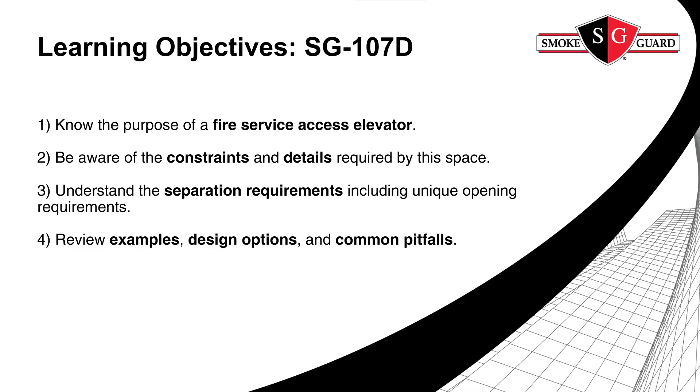In this section, we'll look at the key considerations for fire service access elevators. You'll learn their primary purpose in aiding firefighter operations, the specific design constraints and details that must be met, and the required separations and unique opening conditions that keep these spaces protected. We'll also review real-world examples, explore design options, and highlight common pitfalls to avoid during planning and construction.

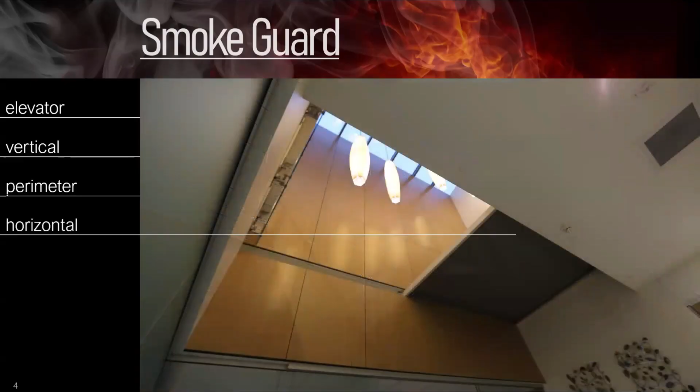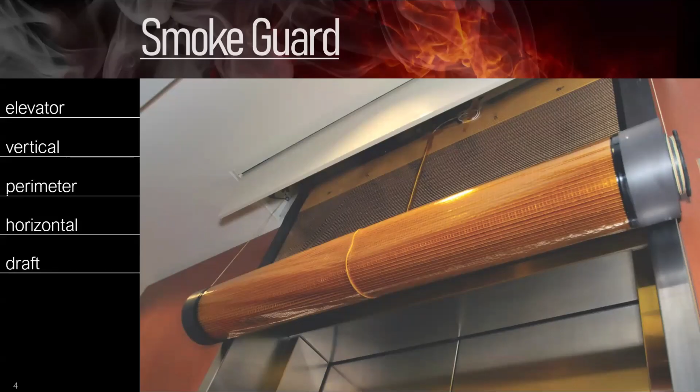Before we get too far into this, this is something we like to put in every one of our presentations because it's never completely understood. We see a lot of notation, a lot of drawings that indicate I'm not sure they're really getting what they need to have in this case. There are 5 types of rated walls in buildings. And when I say rated, that can be smoke or fire or both. The big ones are firewalls that make your building into multiple buildings effectively.

Fire barriers, as applied to this section that we're going to talk about, primarily define shafts. Shaft construction is with fire barriers. Fire barriers can run anywhere from 1 to 4 hours. So there's a lot of variety in fire barriers, what they can be doing, but they are not smoke rated, but they are very robustly fire rated.

Now we get into fire partitions and smoke barriers. And although on the surface they look like they might be the same, fire partitions and smoke barriers are limited to 1 hour. They're only 1 hour systems. They are all fire rated, and they're all smoke rated. Now, the smoke rating doesn't mean too much until you get into the openings. Once you get into the openings, that is very meaningful. And there are even more nuances involved in those that are very critical to fire service access elevator lobbies.

Smoke partitions are important to understand too. Even though they're not fire rated, they are smoke rated. Probably the most common application of smoke partitions is corridor walls in hospitals.

Construction of conventional elevator lobbies in sprinklered buildings. If your building is not sprinklered, even though we rarely do that anymore, then that lobby is required to be constrained with fire partitions. But smoke barriers are not as common, but they have a niche home. They're very important with regard to fire service access elevator lobbies, and they are critical in separating smoke compartments in hospitals. So you see those frequently.

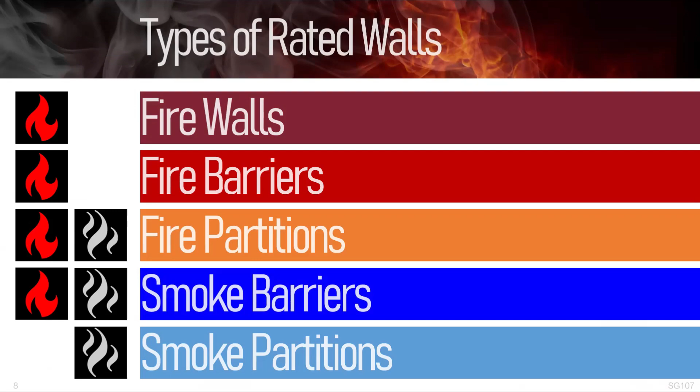Now, as far as the openings go, openings in firewalls and fire barriers are heavily restrained. You only have the capacity to have a total width of 25% of the wall being open. And those could be windows, doors and windows, all doors, whatever combination. That can't add up to more than 25% of the overall wall. That's equally true in fire barriers as well. So that's a big restriction.

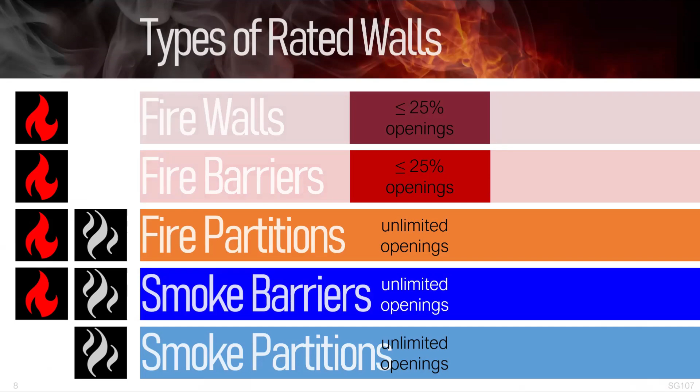It's coincidental that those are not smoke rated. I don't think that there's a relationship. But once you get down into unlimited openings in any of the other wall types, those are all smoke rated. One of the other concepts we want to talk about up front in this, we talked about fire rated walls. There are two others that are important to cover too. Multiple use fire assemblies is critical and lightly understood in buildings. And it's a very simple concept that once you get that in your head, it's very easy to deal with, even though the resultant construction that emanates from this can be rather complex.

If you have multiple requirements placed upon one section of a building component, such as that wall and the black dashed line, and if there are two requirements landing on that portion of wall, such as in this case, there is a requirement for smoke-rated walls, shown in blue, and also the requirement for 2-hour fire-rated walls, shown in red. So the question that emanates from the multiple use fire assembly requirement is, what is the resultant requirement for that section of wall shown in the black dashed line? And the answer is that it's a 2-hour smoke rated wall.

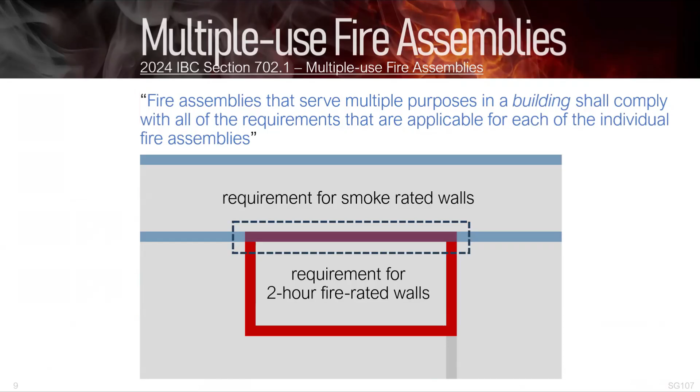Multiple use fire assemblies require that if there are multiple requirements landing on one component of a building, that they are both in play. It's not a question of choosing one versus the other. It's not a question of which one is more restrictive or more demanding. It's simply both requirements. So that section in that black dashed line has to comply with all of the requirements for the blue walls, and also has to comply with all the requirements for the red walls as well. And that also becomes critically important in fire service access elevator lobbies.

This is a splinter topic, but it's important if you're on a job site and you're trying to check and make sure that what you specified was actually constructed. Although y'all may not know this, I did not know this until just a couple of years ago when a fire protection engineer said casually to me, "Dude, you know the label can be on top of the door." And I did not know that. So labels, door labels, are almost always in the spine of the door. But I discovered this through just one unique application where they did put this on top of the door. And sure enough, that is a valid way to do that.

Now, these days, we all have phones in our back pockets. We pull out our phone, we take a picture of the label so we can see what it is. But this is a nice, convenient 6'8" door. 7 feet would be a little more challenging, but still doable. But what if you have an 8-foot door? Can you even see the label? But it is code compliant to put that label on top of the door. So just be aware of that. If you see a door that apparently is not labeled, it may be labeled.

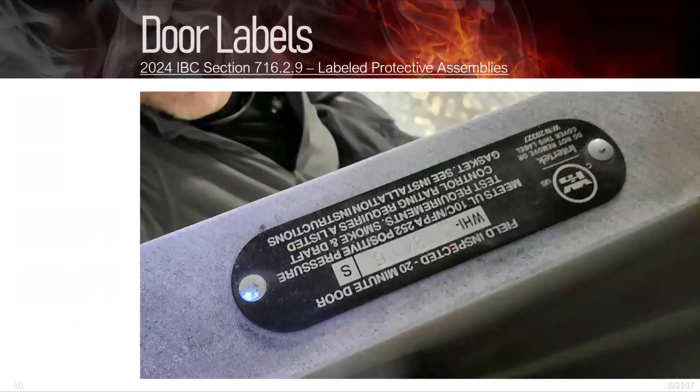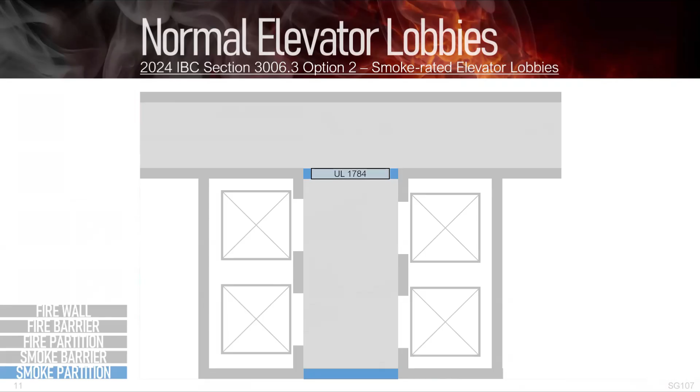Again, in a conventional elevator lobby, it's enclosed, it's separated from the floor by smoke partitions. Smoke partitions are not fire rated, but they are smoke rated. And that's the requirement in a sprinklered building. And I mentioned quickly earlier that on those rare occasions in which we maybe are doing a renovation to a non-sprinklered building, that same requirement is in place. However, it would have to be a fire partition instead of a smoke partition. What that does is it adds that fire rating to that.

So let's go to talk about firefighter operations for a moment. And this is the lead into fire service access elevators. And like I mentioned earlier, we want to know the why before we can talk about the what. So if you have a 4-story building and a fire breaks out on the 3rd floor, what does the fire department actually do?

Well, they show up, first of all, and they do it quickly. And they'll go up the stairs. In this case, you're going from the 1st floor where they access the building into the stair and where they tie into the standpipe, and they go up and fight the fire. This is very straightforward. They'll go right up the stair. No big deal. It doesn't take them any time. So with respect to any elevator lobby or elevator types, not really relevant if they're fighting a fire on the 3rd floor. What if the building's a little bit taller, though?

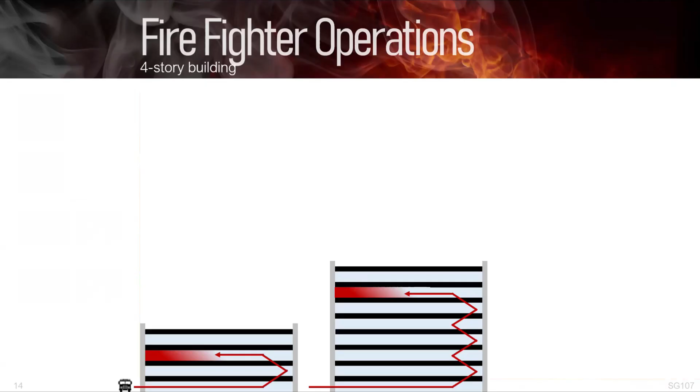So let's dive in, look a little bit deeper. Let's zoom in on that same 4-story fire, and we have standpipe in the corner of the stair. So the primary elements that we're looking at here is just the occupied floor on either side, extreme right, extreme left. Then we have the stair, and the standpipes in the stair. We're showing an elevator, and then between the two, we're showing a lobby. We won't get specific about what that is yet, but it's just a lobby at this point.

So if we have a fire on the 3rd floor, how does the fire department access that? Just as we discussed a moment ago, they'll go up the stairs, tying into the standpipe at floor 2.5, and then they'll take the hoses up. Now they may do this 2 floors below. That's their decision to do that. Most fire departments are going to do 1 floor, but some may do 2.

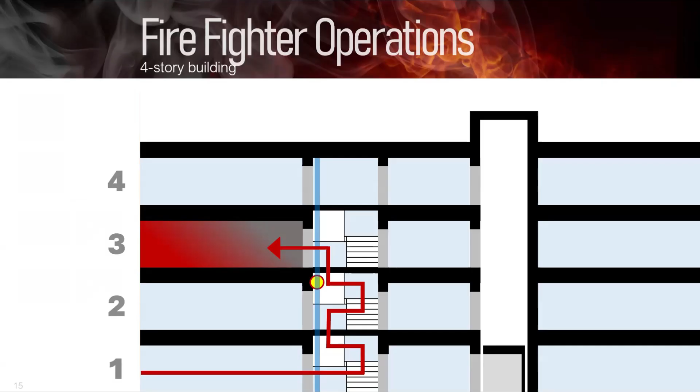So what if we have a building that's significantly higher? We're looking at, I think, an 18-story building in this case. What happens if we have a fire way up in that? This is just a demonstration of how much more complex addressing a fire can be in a tall building. If they're using the stairs, what's going to happen? It's going to take a month and a half to get up there, and they're hauling up 80 pounds of gear. It's just not practical.

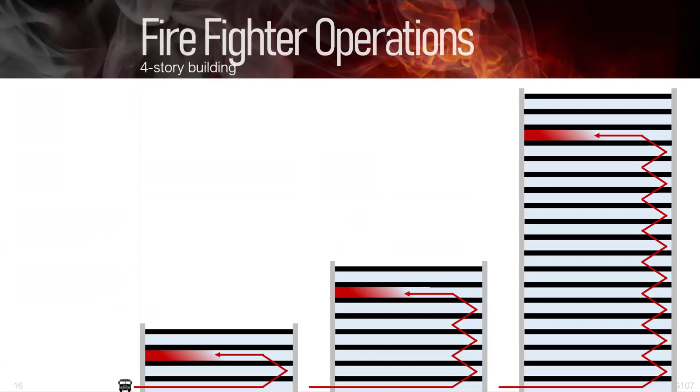So at some point, there has to be some way to help them out. And that way to help them out is fire service access elevators. So the fire service can come in, use the elevator to fight the fire, but we have to take different precautions, and there's different design and construction methods in doing so. So let's look at that same example, but here we're talking about the 21st, 22nd, up to 24th floor.

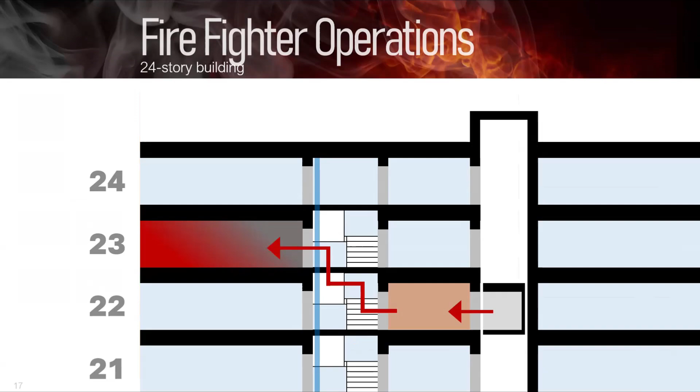In those cases, they would use the elevator, enter what we are going to call the fire service access elevator lobby, and then they're going to address the fire from there. So significantly faster. If we're in a 20-story building, it's immeasurably faster, and it's entirely their option to do so.

In section 403.6, we're going to have the primary requirements for when you need to have fire service access elevators. Now, annoyingly, the IBC breaks it down into 2 different sections. One is where they talk about the requirement for fire service access elevators, and then elsewhere, they talk about the requirement for fire service access elevator lobbies, just to keep us turning pages.

So in this section on the elevators themselves, the requirement for fire service access elevators, and we're going to sometimes shorthand the designation of these to FSAE. They're required in buildings with an occupied level greater than 120 feet above the lowest level of fire department vehicle access. Now think about the site.

If it's a flat site, that makes it very simple. If it's not a flat site, it makes it more complex. It is the lowest level of fire department vehicular access. If you're in a steep city, Pittsburgh, Pennsylvania, San Francisco, California, Knoxville, Tennessee, that could be a 2-story, 3-story difference.

Where I went to college, at Carnegie Mellon, there was a building there that had a differential between the front door and the back door of 4 stories, and it wasn't a very deep building. So it can be a wide range, from the front to the back or from the high to the low point. You just need to keep that in mind that it's the lowest level of vehicular access.

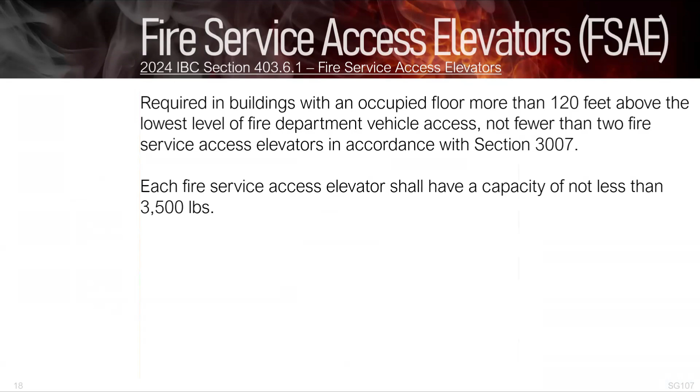Then we're required by this section to put in 2 fire service access elevators. Those fire service access elevators just have to be able to handle a capacity of 3,500 pounds. Pretty straightforward with regard to the fire service access elevators, but less straightforward with regard to the lobby.

The ICC puts convenient, handy diagrams in their commentaries, and they rarely put them in the code. But this is one of those cases where this is from the commentary, and it gives you a nice, convenient little diagram as to when you're required to have fire service access elevator lobbies. So anything from 120 feet on up. And remember that rooftop bars and restaurants are an occupied floor. So it's not just the highest floor, it could be the roof.

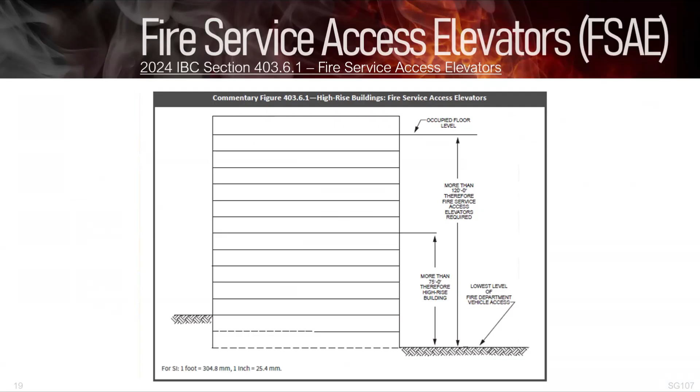Now we go to 3007.6. That section is going to tell you about what you have to do for the lobbies. This is not an exhaustive list. Go through the code and look at all the other things. There's some detail things that are, I don't want to say they're lesser issues. Details are always important, but these are the largest, the most earth-shaking of the requirements.

So fire service access elevators have to open into a fire service access elevator lobby. That lobby is required to have direct access to an interior exit stairway. If you're not familiar with the term interior exit stairway, that's the IBC term for what we commonly call egress stairs, but it's your 2 primary, at least 2, sometimes 3 primary stairs out of the building. From that elevator lobby, the fire service access elevator lobby, direct access is required into that stair. There's a reason for it, and we'll talk about that in a moment.

Those elevator lobbies are required to be separated from each floor by smoke barriers. Now, here we go, getting into smoke barriers. Smoke barriers, again, 1 hour fire rated and smoke rated walls. The reason that the code uses smoke barriers versus fire partitions, which ostensibly have the same requirement, they're application driven.

So whereas fire partitions are in different applications, corridor walls in residential, things like that, smoke barriers are used in applications like this, to enclose fire service access elevator lobbies, but you may be more familiar with them as separating smoke compartments, hospitals, ambulatory care, other types of facilities like that. The doors are one of the key differences.

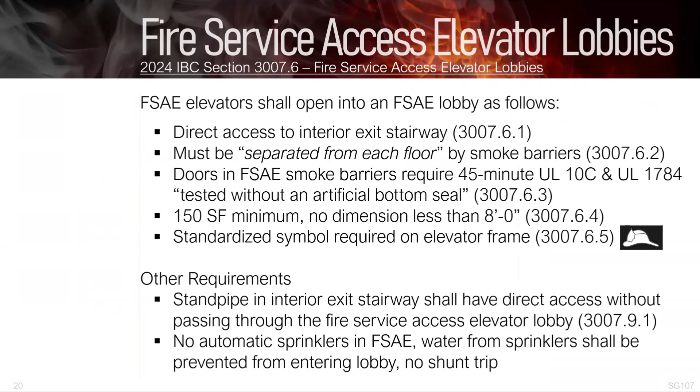There are some other requirements in there too. Probably the most important, and we'll look at some examples in a moment: when you put the standpipe in an interior exit stairway, which they always are, it is required to have direct access that does not pass through the elevator lobby. This is important because I'll show you an example of where this was not done. Keep that in the back of your mind for when we get to that. And there are a couple other requirements too, mostly regarding sprinklers.

This is an ultra generic layout of a fire service access elevator lobby. First thing we're going to talk about is egress through it, because it's one of the more important features. Then we're going to talk about ratings and some of the things. But this is the way the building occupants will use that lobby. They will not egress through the lobby unless they're coming out of the elevator into the lobby. If they're in the hallway, they'll go right into the stair, immediately into the stair. There's no point in going through anything else.

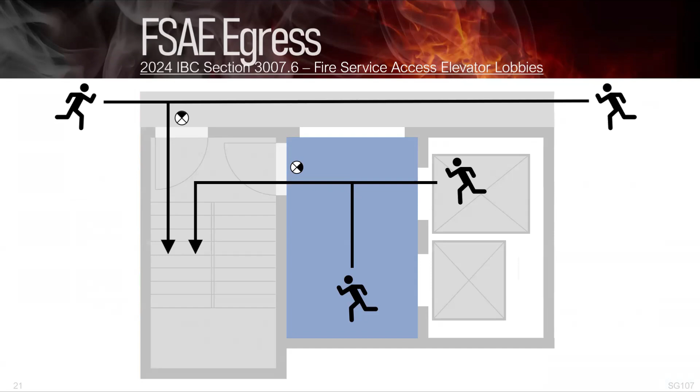If you look in the next building you're in that has one of these, notice where the exit signs are, because there won't be an exit sign into the lobby from the hallway. There will only be an exit sign into the stair from the hallway. And then once you're inside the lobby, you may or may not have a sign in there. The sign is not required. I believe the requirement is for an exit sign if there are greater than 10 occupants, and you're probably going to have about 2 or 3. But nonetheless, with the signs there or not, that is your egress path from the lobby. But it's important to note, nobody is passing through that principal door into the lobby as part of their egress path.

Now, the firefighters have to use this lobby as well. So what are they doing? Well, whatever floor it's on, if they choose to use that elevator, like I mentioned, they will stay a floor or 2 below the fire floor. They'll go in half a level up or 1.5 levels up, as the case may be, access the standpipe, tie in their hoses, then go up the other half and then fight the fire through that door. This is something they will do every single time. They will never go out through the door from the lobby.

And why is that? Well, the whole reason for the lobby is to give them a safe, protected bunker type of space. They'll set up a command post. They'll have their O2 bottles. They'll have a med station. The team leader will remain in that lobby, and then his crew will go up and fight the fire from the stairwell. But they will always fight the fire from the stairway. Again, the stairway is going to be 1 or 2 hour rated.

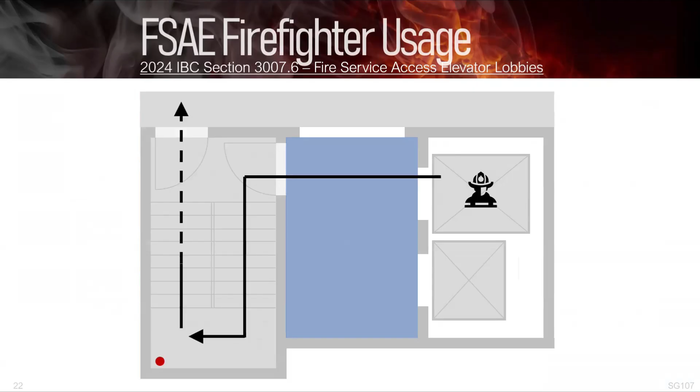But if we are talking about fire service access elevator lobbies, which kick in at 120 feet, although in theory it's possible for that to be a 3-story building, we know that stair shafts have to be 2 hour once you exceed 3 stories. So once you get to 4 stories or greater, they're always going to be 2 hours. So let's look a little bit more at those ratings. Back to the ratings of the shafts, they will be constructed as fire barriers. Fire barriers mean there's no smoke rating required, but there is a fire rating required. Again, in buildings in excess of 120 feet, we're talking about 2 hour shafts.

So those 2 hour shafts will have 90-minute doors at the elevators. They'll have 90-minute doors into the other shafts. All these are doing is plugging the hole, basically, that is carved in there for the purpose of an opening. With a 2 hour shaft wall as a fire barrier, we have to put in a 90-minute door. It does not have to be smoke rated, but it does have to be fire rated. So this is what we're doing in both of these cases. And the requirement's the same in both.

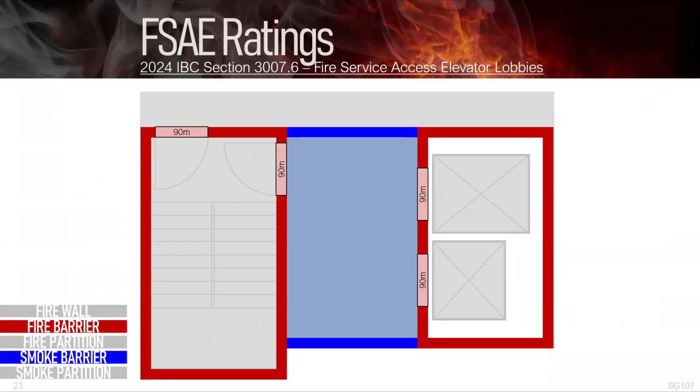You may recall that there was a requirement to enclose the elevator lobby, not enclose it, but separate it from the floor with 1 hour smoke barriers. And it's redundant to say 1 hour smoke barriers. All smoke barriers are 1 hour. But that smoke barrier is fire and smoke rated at the same time.

Openings. This is where you get into that 45-minute S-labeled door. It's not as simple as just a smoke rated door, even though it just says UL 1784. It's required that it be tested without an artificial bottom seal. That narrows down your choices significantly, because a regular old side hinge door is not going to cut it, because those are typically not, I say typically, I've never seen one that has been tested without an artificial bottom seal. You get into overhead systems and you get into integrated hardware doors, then you get into tested without an artificial bottom seal.

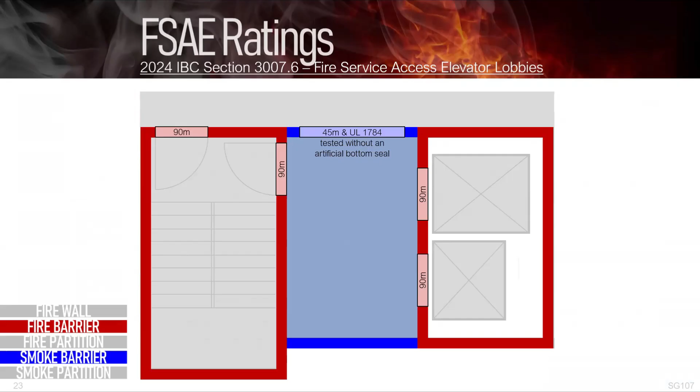So be very cautious. That's one of the most missed items that I see with regard to fire service access elevator lobbies, is that testing has to be done without an artificial bottom seal. There is an option. The wording in section 3007.6 said that you have to have direct access into the stair. There's an exception underneath that. That exception says that you can go through an area referred to in the code as a protected path. And here's the language for the exception.

Now, I don't usually like putting all the code language up here, but we'll do it in this case because it's important to understand the language they're using. One reason that it's important to read this language is that the last thing they refer to is that the door between the lobby and the entry into that protected path is required to be smoke and draft rated in accordance with section 716.2.2.1. Now, if you're familiar with that section, you'll remember that that section talks about fire rating, not a smoke rating.

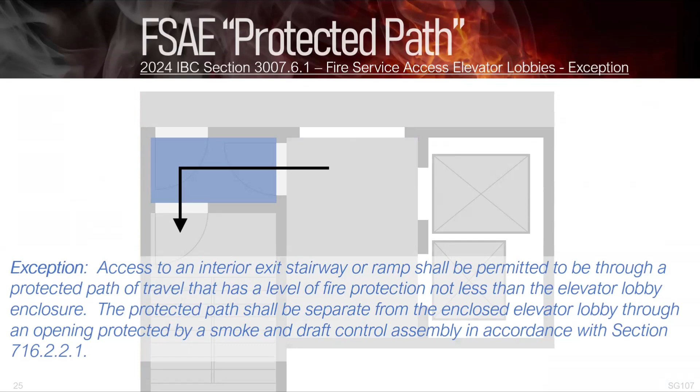Now, there's a subset to it that requires a smoke rating, of course, and that's 716.2.2.1.1. However, they are saying that you're required to have a smoke and draft control assembly in accordance with the parent section, which requires a fire rating. It's a poorly coordinated language issue with the IBC, but it does introduce the fact that there's some ambiguities to what the requirement is. In my mind, it's easy enough to put in a smoke rated and fire rated door. It's probably the way to go, but it's an individual decision because there is that ambiguity with the language in the code.

So let's look at this in practice. Here we have the same ratings for the shafts. And now we have to separate it from the floors with a smoke barrier. And that protected path vestibule type space in the upper left is part of the floor area. So we have that separation there with a smoke barrier. So already we know that wall portion separating the protected path is fire and smoke rated. This leads back to the previous language; that's why I think that it needs to be a fire and smoke rated door. But that protected path has to have the same protection afforded to it as does the fire service access elevator lobby. So that protection is the same there.

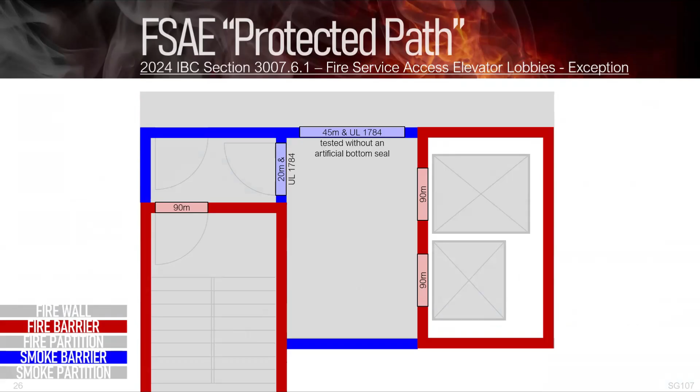So looking at some of the doors. Now, this is where the 90-minute doors through the fire barriers, into the stair or into the elevator, are very straightforward, very common. We see them all the time. The 45-minute door we talked about a moment ago. That door into the protected path, this is where the question comes up. Is it 20-minute and UL 1784? The commentary in the code says that it's only smoke rated, but we have to acknowledge that it is an opening through a smoke barrier. So that is fire and smoke rated. So that's one of those things that you have to make a judgment on.

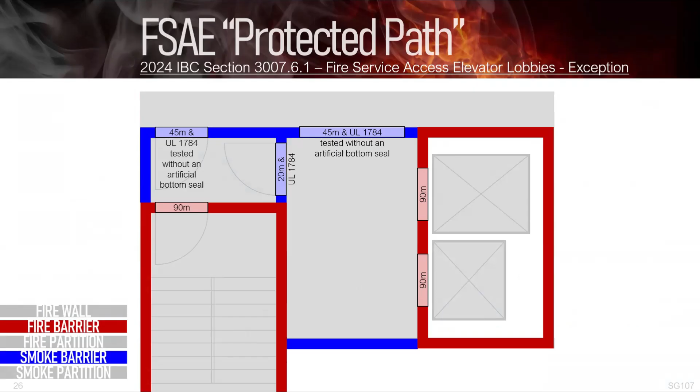Since the protected path is required to be afforded the same protection as is the fire service access elevator lobby, that door is also then required to be 45-minute UL 1784 tested without an artificial bottom seal. That's really important. Consider if that was not the case and you have smoke filling the corridor up on the top of that drawing. That smoke is going to pretty quickly force its way into that protected path and then very quickly force its way into the elevator lobby through the next smoke rated door, which is not required to be tested without artificial bottom seal. So that outside perimeter is your defense line. If these firefighters are in that space for an hour fighting the fire, if they don't have that protection, smoke is going to get into that space.

This is why you have to figure this stuff out and make sure you get it right early in the process. Because once we hand the project off to a structural engineer, he's going to take advantage of opportunities to put in shear walls. That's going to be it. And if we've articulated a doorway improperly, we're not stuck with it, but it's a lot more work to get yourself out of that picture.

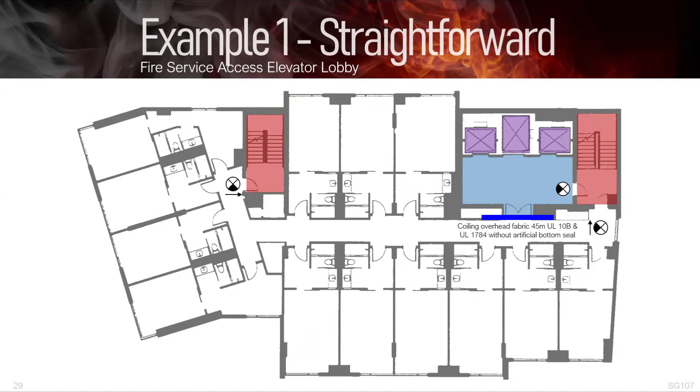And what happens when that thing closes? It stays closed. Nobody needs it. It's not on your egress path out of the building as a building occupant, and it's in no way in the way of the fire department in addressing the fire. Every fire department operation is always using the stair as their entry point to the floor.

Now, that was a pretty straightforward example. We still identified a door that was not properly designated as tested without an artificial bottom seal. But that was a simple project. Let's look at something that's a little more complex. There's a lot going on in here, and it's a very common layout in the big picture. If you look at this in detail, it's a little more unique because it does have a fire service access elevator lobby on the right side.

So what do we have here? Well, first of all, it's residential occupancy. It's an apartment or a condo. They're probably apartments. And apartments, residential occupancies, are required by table 1020.2 to be enclosed with 1-hour rated fire partitions.

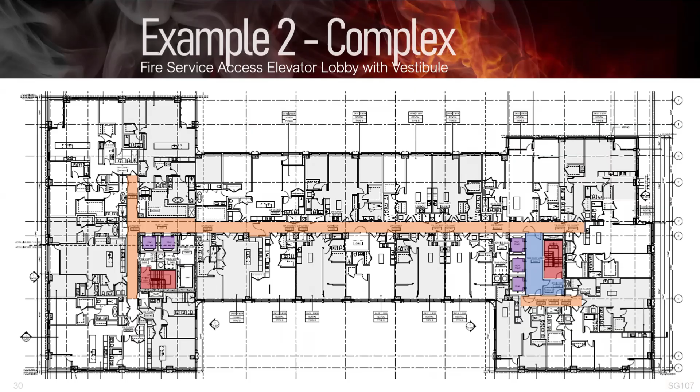Fire partitions are required to be smoke rated and fire rated, and all openings in fire partitions are required to be 20-minute S label. There is no requirement for tested without artificial bottom seal. So, for example, all of the doors leading into all of the units are all going to be 20-minute S label doors, every one of them. Zoom in a little bit. We're going to look at a couple different aspects of this fire service access elevator lobby. I wanted to point out some of those things because we'll come back to those in a moment.

Let's look at egress and only at egress for the moment. So how do we get out of this building as a building occupant?

Well, if you notice on the bottom end of that, there's that little short corridor that serves just a couple of units. I think it serves 3. And that's all it does. So there are 3 units in there. We maybe have, I don't know, 3,000 square feet. And with residential occupancy counts being at 200 gross, that takes us to about 15 occupants.

And table 1006.2.1 requires that you only have to have 2 means of egress if you have 20 occupants. So that corridor down there, that little short corridor, having 1 means of egress is probably okay for the code. Now, would it be nicer to have 2 ways out? If I lived there, it would be. But it's code compliant.

With that in mind, if you look at the doors on the south end of the lobby, you'll notice that the door swings into the lobby from that space and also swings out of the lobby from that space. It's a biparting door. So they were cognizant of the fact that they wanted people to be able to egress to get to the other stair through that lobby. Now, remember, any elevator lobby is permitted to be along your egress path. It's one of the few spaces through which you can egress on your way out of the building. So you can do that. Not sure that it's convenient or it's going to work well with the firefighters, but you could do that.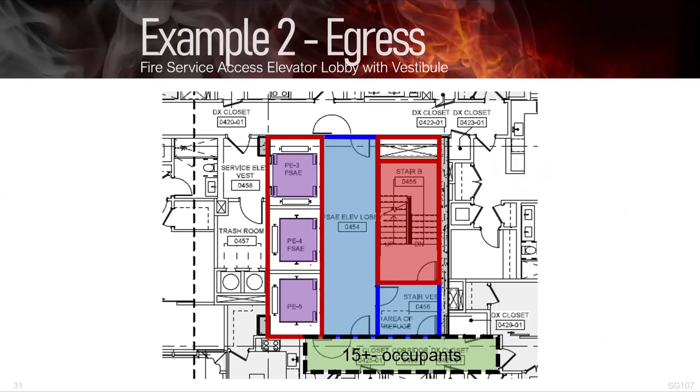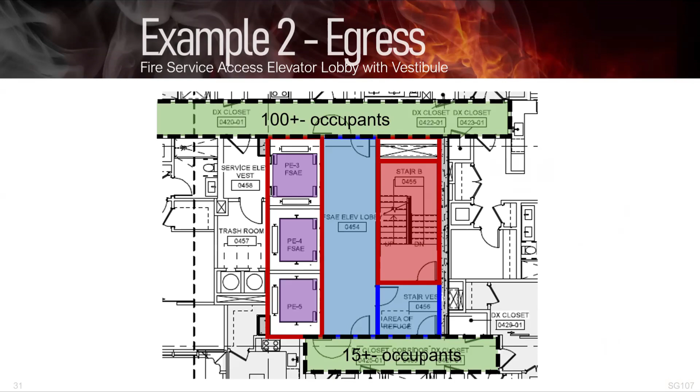The problem is not in that direction, though. The problem is in the other direction. So we only have 15 people there. So we could use that single way out without going through the elevator lobby. The other longer corridor cannot, though. We probably have 100 occupants in there, give or take, and they have to travel through the fire service access elevator lobby to get out of that space. So they have no choice but to do that.

Now, keep that in mind. We're going to talk about some other issues, and these are going to all kind of merge together just a little bit. So let's look at the door ratings. Remember, we talked about multiple use fire assemblies. That means that if there are multiple requirements landing on one building element, you have to comply with both of those. So the corridor that we see on the north end, or on the south end for that matter, that corridor is constructed with 1 hour fire partitions. So the 1 hour fire partitions will be coincidental with the smoke barriers and the fire barriers that run through there.

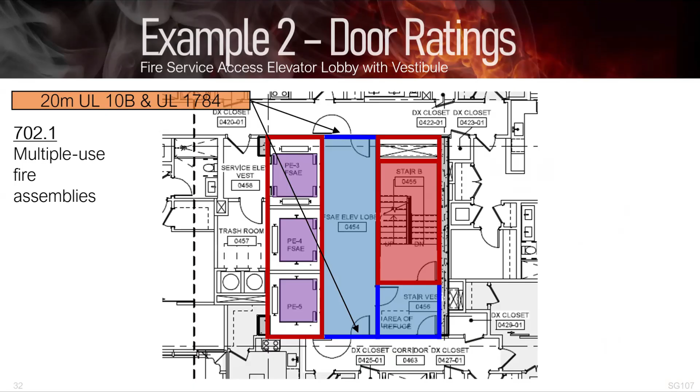So those doors, because they are doors into or out of a fire-rated corridor required to be constructed with fire partitions, are required to have 20-minute UL10B and UL1784 doors. Exactly the same as every unit in that hallway. No difference, because it's an opening in a fire partition. For the purposes of the fire service access elevator lobby, you're required to have 45-minute UL10B and UL1784 doors tested without an artificial bottom seal. So if we look just at the fire rating, 45 minutes is greater than the 20. If you have a 45-minute door, it covers both of those.

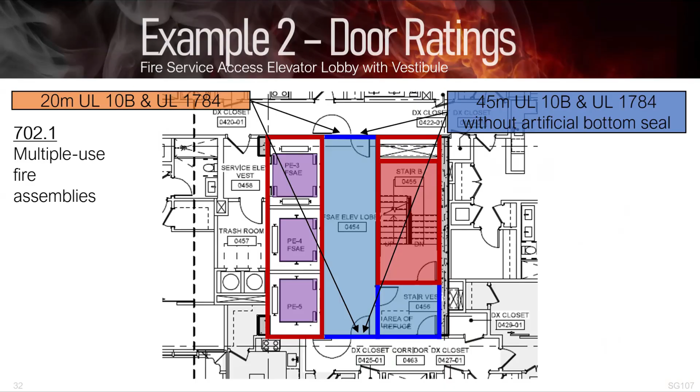And on the smoke side, if you have a UL1784 with no designation as to tested with or without an artificial bottom seal, then there's no way to tell whether or not we comply as a door for a fire service access elevator lobby. So we need to have that testing without an artificial bottom seal, and it will comply with both of those requirements. This is not a choice between the two. We're not picking the more restrictive. We're complying with both.

You may recall that there was a requirement for direct access from the standpipe into the corridor. So let's go back, put our ratings back in there, and let's go ahead and properly rate our fire service access elevator lobby. And remember, in this case, they have that protected path. So far, this is fine. But we have our, actually, before we do that, look at this for a moment. And in thinking about the standpipe, consider whether or not this is code compliant and whether this does, in fact, work with the purposes that are expressed in the fire service access elevator lobby requirements.

In the meantime, since it's connected to this, there's another side shoot on this. That elevator, that PE3, has a back door to it. It's for service. And it is permitted to have a normal conventional smoke rating on the back of that door, even though the front of it is into a fire service access elevator lobby. So that is a perfectly code compliant solution right there.

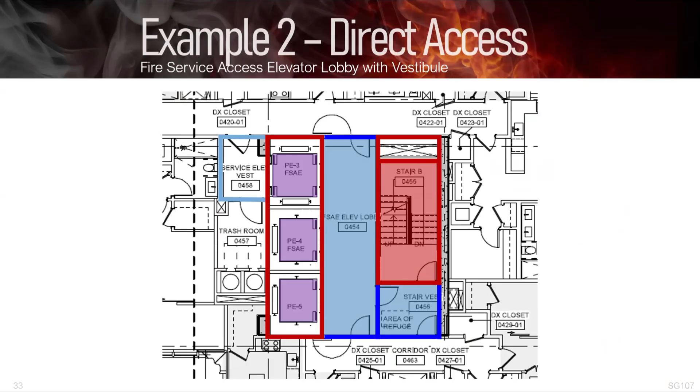Now, what is the problem that I was alluding to a moment ago? There's the standpipe. Does it have direct access into the corridor? Well, if you go straight down to the south and go into that corridor down below that serves those 3 or 4 units, yeah, it's fine. So it works down there, but doesn't work up there.

The only way for a hose to go from that standpipe to that corridor on the top side of that drawing is to go through the fire service access elevator lobby. That's specifically prohibited. So let's think about the things that don't work on this project. How about the rating of the doors in and out of the fire service access elevator lobby? If those are side hinge doors, the only solution is an integrated hardware door.

However, in a lot of other cases, not when you're having egress going through it, you can, in fact, have overhead coiling fabric doors or steel doors for that matter. But the one thing that does not work is access from the standpipe to that north side corridor. Now, I point out all these little things, not to make fun of this project and not to tear it apart, but to make sure that we all understand just how complex these things can be.

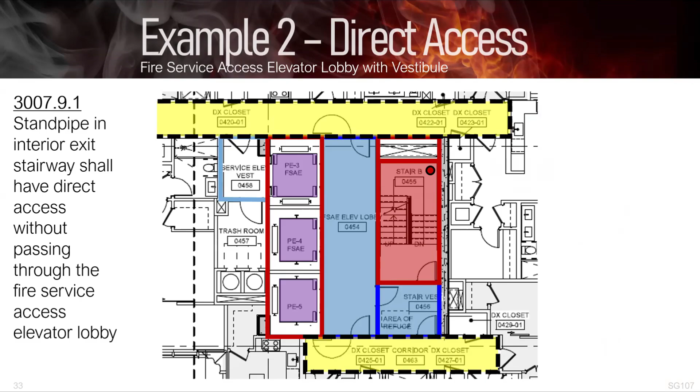So just to go back real quickly, the purpose of the fire service access elevator is to get the fire department to the source of the fire quickly. We talked about the details on these spaces, adjacent spaces, coincidental spaces, understanding that multiple use fire assemblies is always in play. If there are multiple requirements landing on one element, it has to comply with both of those. So just be cognizant of that as you go through your projects.

Separation requirements is a very unique space. It is the only place in the building that I can think of, and I've been looking for another one, where you have a 45-minute door that has a requirement for an S label tested without an artificial bottom seal. And then we looked at a couple of examples of that.